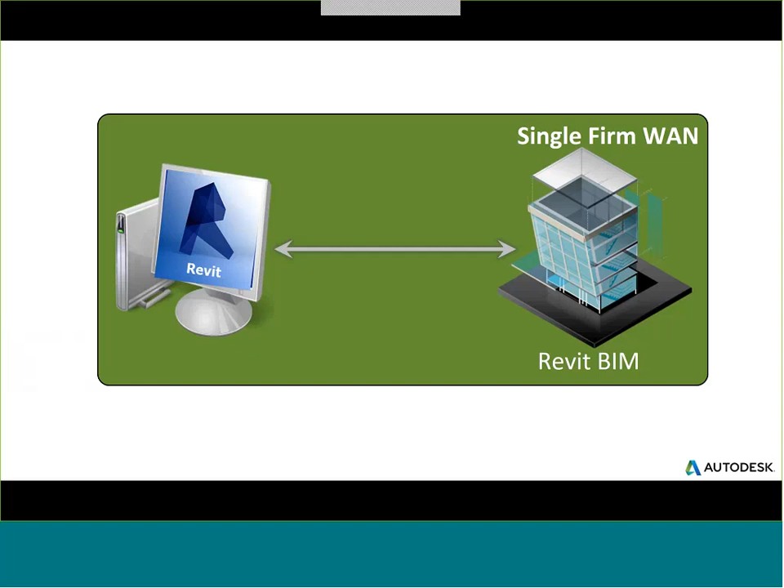You have a central file that you're making today internally. Essentially what you're looking for is this ability to bring that central file, and you know that the cloud is out there, and you start trying to think about how can we do this. And some people try to use cloud storage systems like repositories where they just upload the Revit file up there and then somebody downloads it back down and they think that that's sharing the central file.

Well, technically it's almost like going and mailing something - a letter comes into your mailbox and then you're going to mail that to somebody else. That's the equivalent of what they're talking about.

What we're talking about is no longer will you have to do a full - if this circle is 100 megabytes, no longer do you have to do a full upload of 100 megabytes and then pull down a full 100 megabytes and then rinse and repeat. That is not Collaboration for Revit.

Collaboration for Revit is going to be, hey, let me reload the latest and greatest nuggets of what my model is all about instead of me propagating the entire heavy package. So it's not totally new as a concept, and this is what many firms have been doing when they put money and technology and time and people at the problem.

So cloud sharing, this is one way that I know firms are trying to do it without buying the service of Collaboration for Revit. So make no mistake, there are dollars being spent here. And the dollars typically mean that they're buying software, or they're buying hardware. They're applying a Revit server software to it. They're spending money on VPN connections, which is actually the holy grail behind all this stuff.

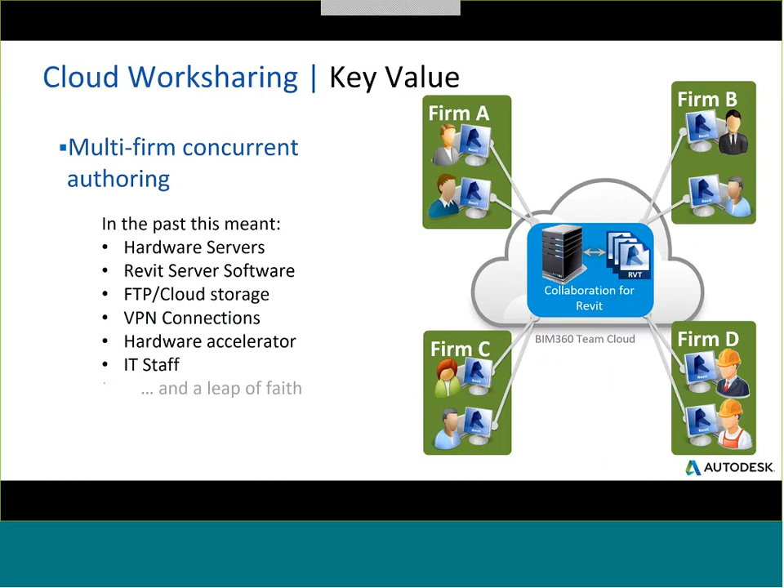So what this saves, and I'm all for IT, some of my best friends are IT people, but IT can help institute the rollout of Collaboration for Revit, not with their technology, but possibly through the administration of the licenses. So no more is IT seen like this, with your project managers jumping through the hoops. That is gone by the wayside. That's not the case anymore.

IT will administer, or if you have IT and they're administering your Autodesk licenses, they can administer those licenses to the people that need them most and give them the right licenses for the right amount of time that they need it. Those are really good precedents for Autodesk technology as compared to using Revit for project managers.

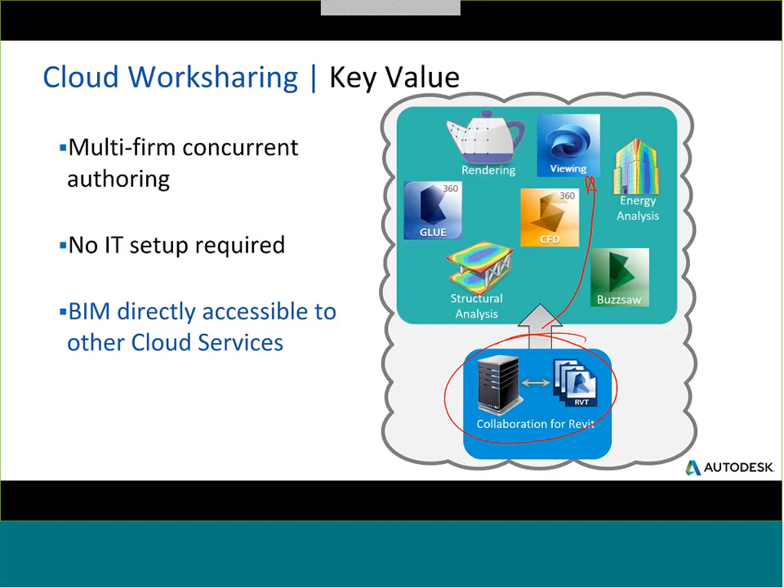So one of the big things we're going to see is when we're leveraging the cloud, how can we also use the cloud for that viewing piece that I'm highlighting? And again, this is where BIM 360 Team comes in, and only Team is allowing you to view those things with a very light Team license.

So this is me with a little bit more hair. Usually my hairline kind of stops right about there, and I'll put my geek hat on here and tell you some of the inner workings of C4R.

So we implement a delta caching system and a delta upload. That basically means when you first start running C4R, the very first time you collaborate in the cloud, remember I said 100 megabyte file? Well, when it first goes to the cloud, obviously it has to put the whole model there. So yes, the very first time it pushes 100 megabytes up. It pushes 100 megabytes up, and then it's in the cloud and it says, okay, Caesar wants to work on this file, so it pulls 100 megabytes down. Once one way, once another way, and it develops this local cache.

So in a nutshell, the local cache actually gets built without you even knowing it, and it gets put into a hidden user profile file. It's typically, if you want to look into it, under your profile name, under all user, or under your username, under the AppData hidden file directory under local. It's down there in the basement, but it's there. So that's the very first part.

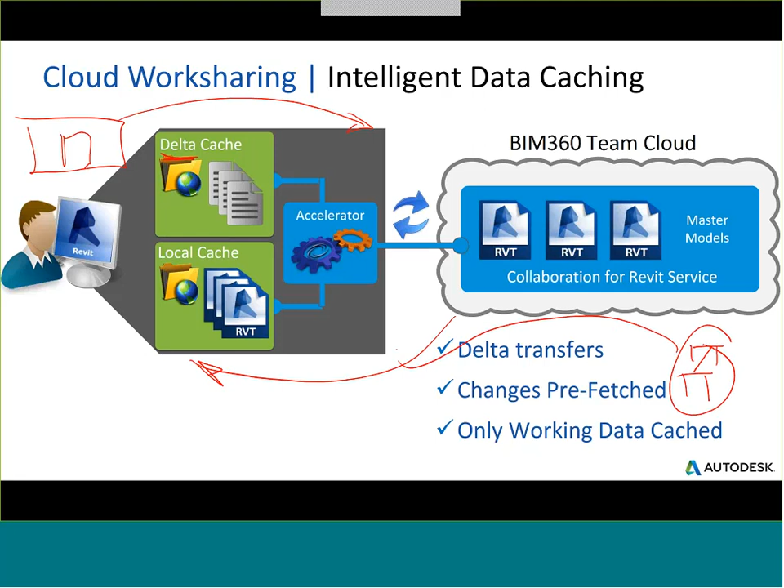This saves all that trouble. So this saving is a savings in time. It is also a saving, and I no longer have to concern myself about versioning because it takes care of itself automatically. So these are safeguards, and they are pointing to a savings, a return on investment.

The part about communication, this is part 2 of the discussion. We think about Revit as a mission-critical tool, but there is really no great way to communicate inside of Revit. That's why we pound ourselves with emails and simple little questions, and we get tons of them in a day. We've built into Collaboration for Revit the Communicator aspect, which gives people a palette called Communicator in Revit while the session's running.

You can see your teammates signed in. When I sign in, I'll show up here with a little green indicator saying I'm online right now. I can do direct one-on-one chats with a person, or a team chat, like 'hey guys, I've updated the grid, it's now 12'2" on spacing, grid line to grid line.' I can also do screen captures to illustrate what I'm trying to say as far as written information. These are all good mechanisms to help reduce email.

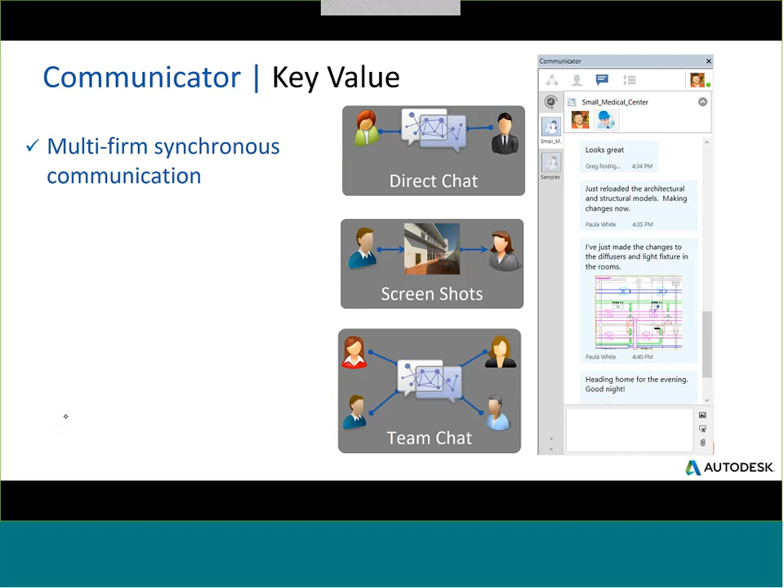So those are all great things in Communicator, but like your favorite cheesy commercial on TV, we're not done there. Contextual awareness is fantastic because with Revit Server, you never really knew who was saving to central, and sometimes it felt like it was bottlenecking, taking longer today to save than it did yesterday. Communicator is nice because you get to see the context of who is saving when and what they actually saved at that time.

And lastly, for those people that feel disenfranchised because they never get the new cool stuff to play with, let's bring them back into the sandbox and connect the entire team together. This is where an individual license of BIM 360 Team can be purchased just for those users who are not on Collaboration for Revit. So buying a BIM 360 Team license allows these things for those people.

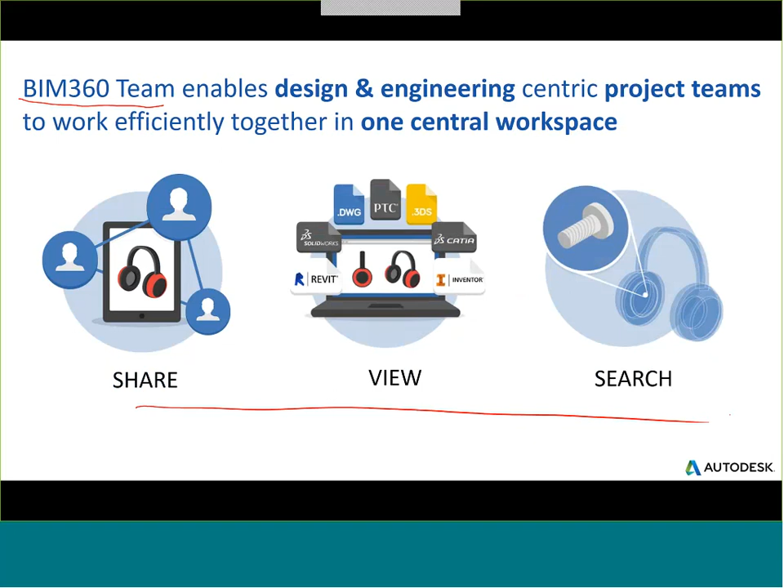Some of the highlights include 2D, 3D markup capabilities. One of the huge differentiators, because I know many of you are using some kind of PDF competitive software to do your design reviews, that's fine. But let me propose something to increase your savings and have everything here. I'd propose that you run an Autodesk kind of shop with some of these design markup tools. The differentiator we hold is we allow you to put these file formats into Team and view them natively. So if you had a file format you created, say PDF, because you wanted somebody to review and mark it up, you no longer need to create a PDF file. You can put the native files up there and they can review them.

The design markup explicitly works on Revit and DWG files, the native files. So that markup overlays on top of it. It doesn't embed itself into these files. It's an overlay, and it's part of the team website.

The native viewing that we have is for all of these files. You can comment, so I'm just going to put the letter C above this. You can put comments on the DOC and Excel files and have them natively viewed inside of Team as well.

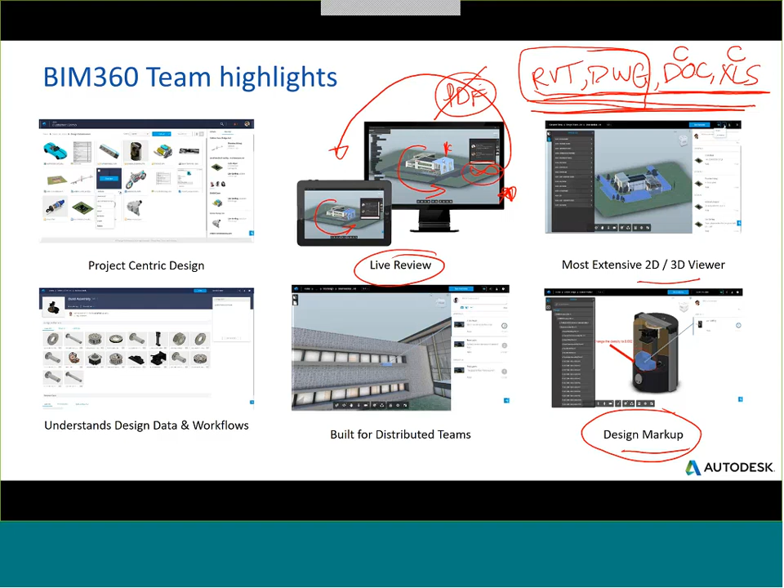Jana will say, okay, I'm sitting at the coffee shop, I've got my iPad, you want to show me what you're looking at on screen. So as I rotate this model, Jana's going to see the same rotation because her view is my view. We can use the chat window inside of this to chat, or use our telephones for audio. The Live Review is fantastic because it's a no charge extension that you can send this link to anybody, even if they're not on Team, and they can check out your screen.

So the geek in me is willing to tell you that in any format, it's really running the very powerful Navisworks engine in the background that's been enhanced, but that's just the geek in me. You would never know it when you go on Team.

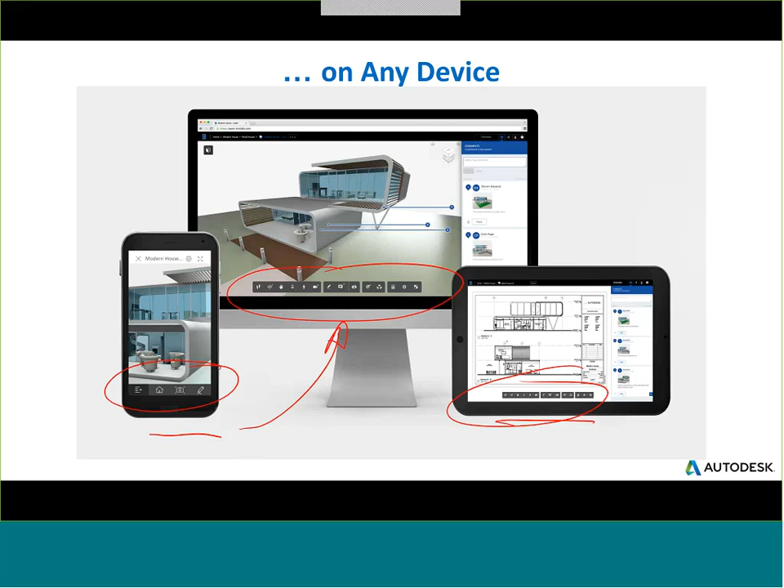You should know that we really focused on developing this for the tablets and iPhone first, and then we actually ported it over to be the web version for browsers of any computer, whether it's Mac or PC. Your tools will really reflect the same usage across all devices, which makes it very usable.

And so in a nutshell, it's kind of like that shopping channel. So what's included? Central file.

You get to work in the central file, the files in the cloud. You're always working remote on your desktops. When you buy Collaboration for Revit, those licenses include a license of Team for that same user. The Communicator gets turned on inside of Revit, and you get to use it with the other people who are in that project with you who are also using Revit.

The model management and versioning tools, that's a function of Team, and we will manage the versions for you out of the gate. And the scalable licensing, this is where I was saying IT can really help out here, or whoever's administering your Autodesk licenses.

Jana comes into my project, I can allocate a license to her, and then once she's done the project because she's moved on to something else or she's left the firm, Lord forbid, I can revoke that license and administer it to somebody else. So moral of the story, the license follows the user and not the machine.

Right, so I can run my user license on any machine that I walk up to as far as Collaboration for Revit or Team.

So there's a price to it, and it is much more affordable than running that other shenanigans with the VPN connection and the hardware servers. $800 a year for a single license, but the payoff can be, if it just saves you 10 minutes a week for the duration of a year, it'll pay for itself. And think of the times that you upload and download and move those files around.

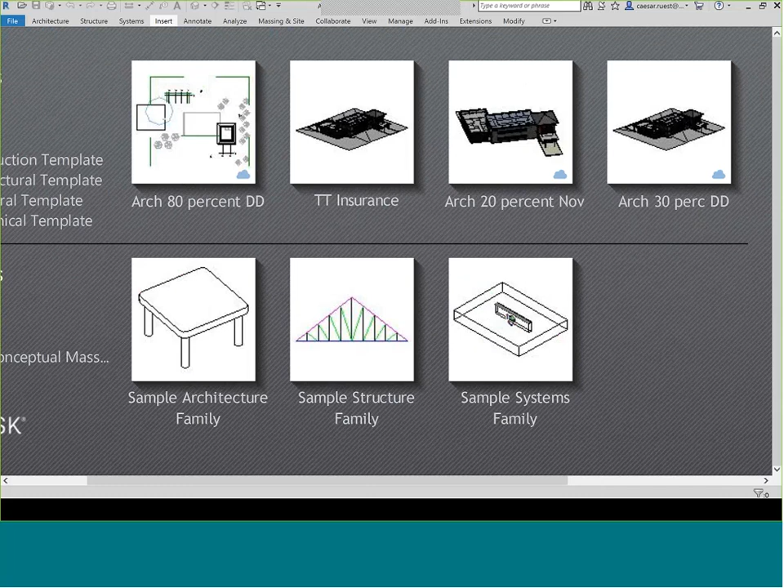So how do we know that we've got collaboration for Revit and we're using it? Right within Revit you can see some differences if you've never seen this before. You see these little monikers, a little cloud. You can see the path, BIM 360, May 2107. This one here, TT Insurance, C temp drive, TT Insurance. This is telling you local file, cloud file — this file is living in the cloud. You'll also see we've got the hooks to go to BIM 360 team right there. That's because C4R is already installed, but now you've activated your license of C4R, and that's why you see this hook into BIM 360. Clicking on it would let you get into that BIM 360 cloud and open up the file.

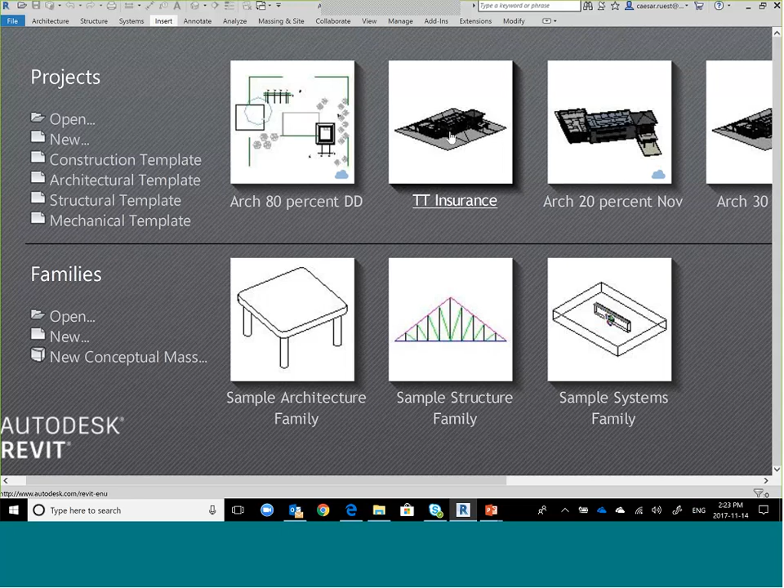Let me step back to show you how to get the file there in the first place. So TT Insurance, let's pick on that for a second.

So from C drive, I want to go to my Collaborate tab. This is not a central file, but it could be — it's up to you. When we click on Collaborate in the cloud for the very first time, this button goes away; once it's in the cloud, this button will disappear. But now that it's not in the cloud yet, that's why it's showing up. So we're going to click on it. This is where we're preparing, just about to send it out to the cloud. Now I'm going to call this — let's say this is my 80% DD for Jana — and I want to push this to the cloud.

And you kind of ask, okay, so where are these things? These are projects sitting somewhere. Well, this is my cloud projects. So as an administrator, somebody that buys the licenses and wants to start rolling this out, the first thing you do is create yourself a hub, and then create your projects that come out of that hub. So here's my hub — picture this to be your company name. Each license of BIM 360 or Collaboration for Revit gives you a single hub of 500 gigabytes. As a company, if you bought 4 licenses of BIM 360 Team or 4 licenses of Collaboration for Revit, you'll have 4 times 500 gigabytes, so effectively 2 terabytes of storage at your capacity, because it can pool together for a corporate hub. From this hub, you create your projects.

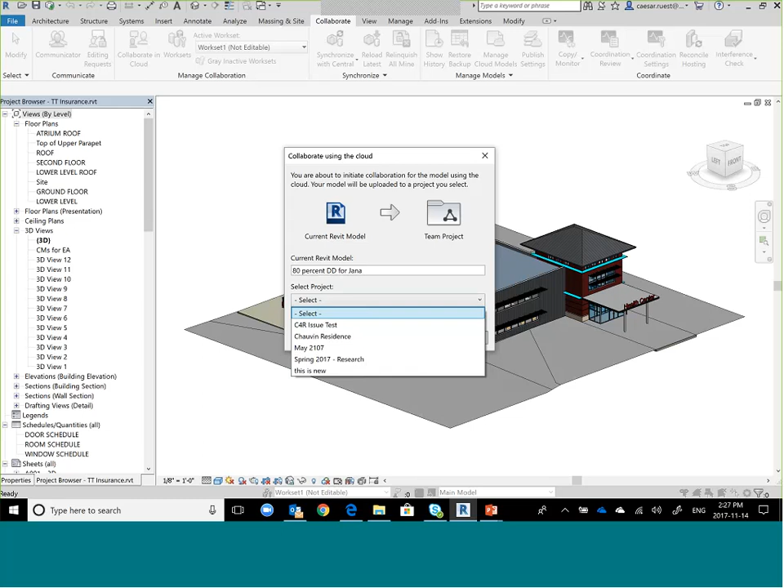So the administrator will do this. This was part of a question Jana had asked me to address: how do BIM managers have the ability to manage all projects on C4R? This is it. As the administrator, you're Superman or Wonder Woman — pick your favorite superhero, you're that godlike person. You, as the administrator, control these projects. If I have Jana, who's my project manager of May 2107, as the administrator I'd make her the project manager, and she would only manage this project. So when I go into May 2107, Jana would be here, she'd show up as one of my members, and she'd be able to invite people to this project. But she wouldn't see the other projects I created as administrator. So those are the steps you take to create projects from your hub, and then administer them to other users. We created this project along with these other ones, and that's the only reason why when I come here I can say I want to put this file up into the May 2107 project and initiate.

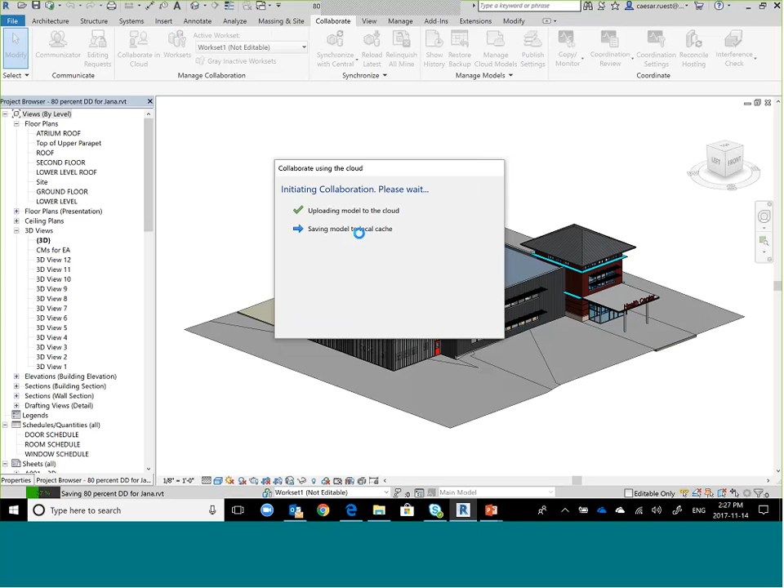So this is not a central file, so it converts it to a central file by creating default work sets. You'll see at the top of my screen, it's going to change my file name over to this new file name. So it will abandon my local file and my local file name, because when it's done uploading it to the cloud...

It automatically comes back to say, hey, Cesar wants to start working on this. I'm going to save him a locally cached version of that central file, which is the local file. So many of you, if you've done this today with central files in your office, you know you manually have to create your own local file.

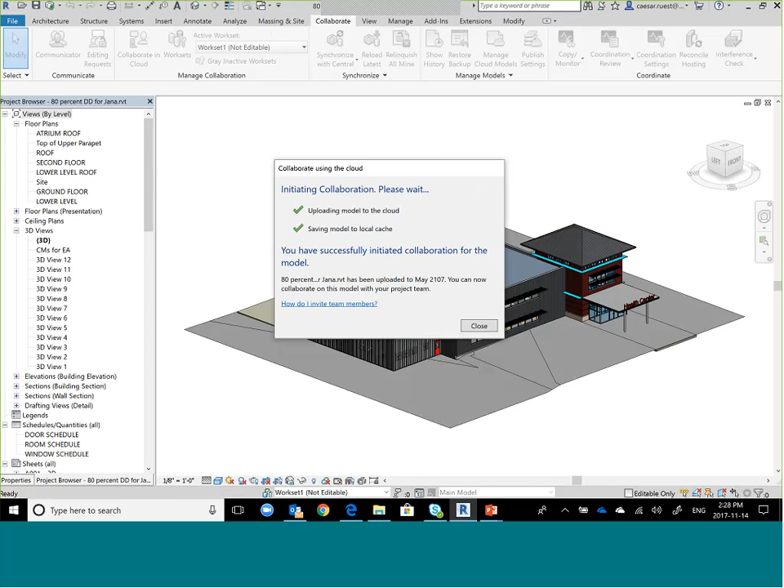Today, we do it transparently for you. So we're done. This lives in the cloud now because you've got your Save to Central icon lit up, and that button that was here is gone. Now, there are a few things you're going to become more familiar with.

There are parts of Revit maybe you've never touched called publishing. After the first Save to Central, it automatically puts a default model into Team because there was no placeholder there at all. So when I come into 2107, somewhere within here, there it is, it puts a default published view into Team.

But you should all know that we hold Collaboration for Revit separately. It's its own site, its own web server. That means the central files will never live in Team. These are only published views of the central file living in Team, for a few reasons. They live in two separate areas altogether. My central files can never be damaged by just people using Team.

But the real power comes to you guys now within Revit. If this is a publish capability, you would create a published sheet set name. So we created this new one called Sheet Plus. Let me create a brand new one, let's say for Jana. I'll say OK, and I'm going to tell it I want to use this one.

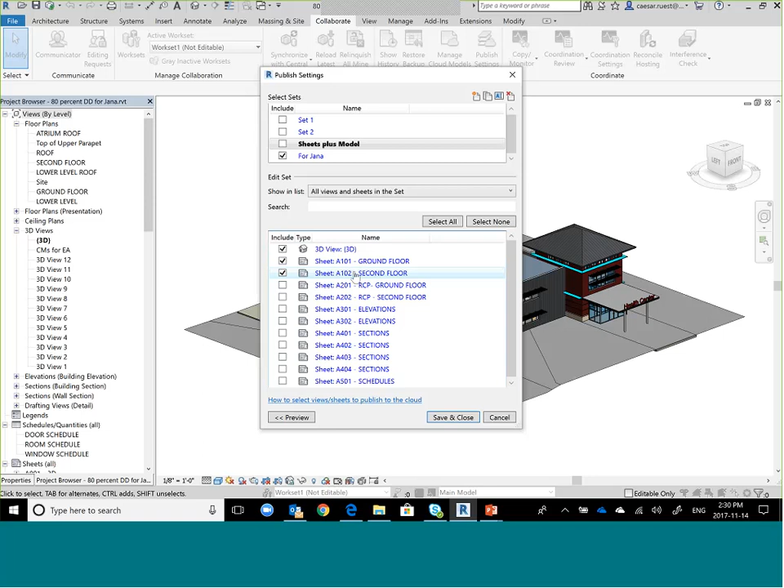In this publish set, I only want to send Jana the 3D model, the first floor, second floor, and what else? You can send other views too, but let's say we just want to send these three things to be published. In architecture, we want to send 80% DD and let somebody run with it for a week, so we only want to send them those sheets which are completed. This is the mechanism to do that.

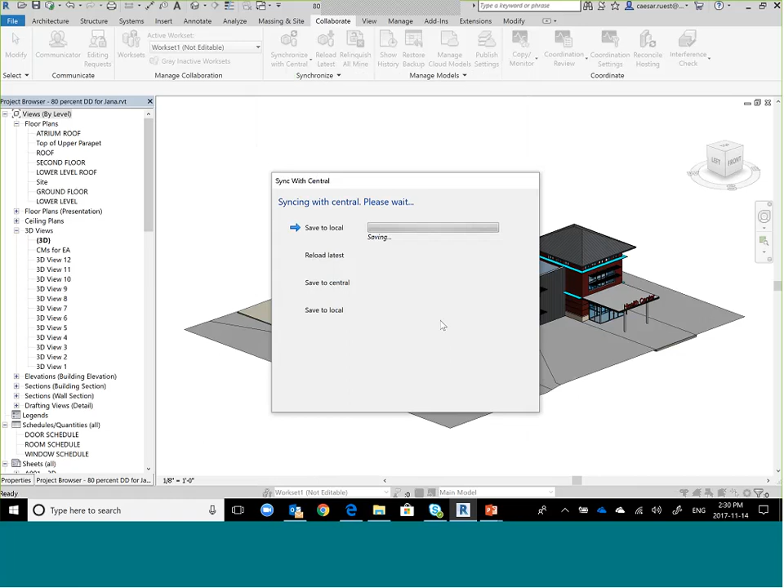So it gives you a chance to create a discrete set of views, and from those discrete sets of views, they will be published onto the Team site. So clicking Save to Central just saves those sheet sets with the central file, but it did not publish it yet. So for example, if I went onto Team right now, that's just saving to central, and we would think, oh okay, if I go into Team right now and took a look at Jana's file, I would only see those 3 views, and that's incorrect.

The only time publishing actions can take place is through Manage Cloud Models. This is button number 2. I showed you the Publish button a second ago. I'm on this button right now, Manage Cloud Models. This is the publishing area. So you would come to here, and I'll zoom in so you can see this.

So look at these files here. This Arch 80% DD, you can see it's got a green checkmark and it says latest version published. Whereas this one, like I told you, those 3 sheets I wanted to send out are not specifically sent out. So I would tell the system, okay, take the Collaboration for Revit model and publish this to Team. It gives you a little bit of education, you say 'got it', and you publish. Now you can close that window because it's going to go ahead and publish this to Team.

Now, if you had all of these files, as the administrator of this project, you can skip the steps of publishing every single one at a time, and you just come up here and say 'publish all'. That's what this button is for.

And while I'm in here, this has been a recurring question too. I've had people say, hey Caesar, I've got a file in Team. I keep deleting it off of Team, even though it says RVT. I keep coming to this drop down and saying delete. It keeps coming back, like what's going on?

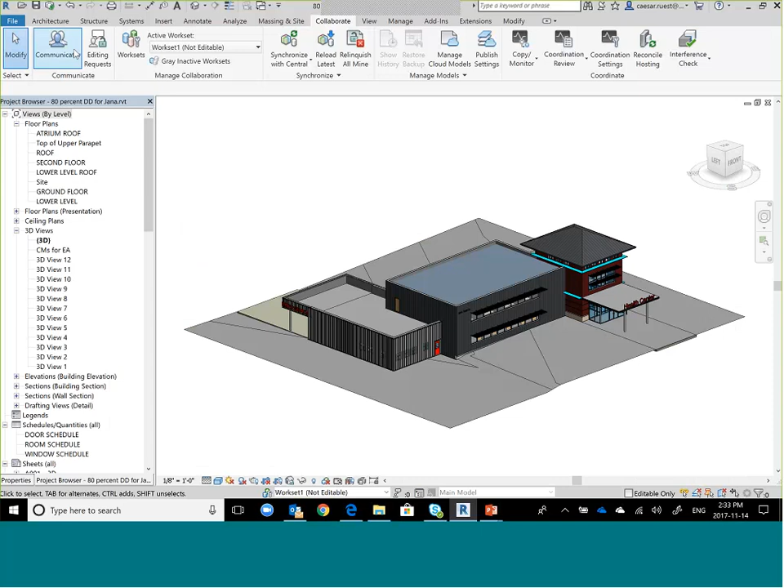So within that section, let me finish off Revit with the Communicator. Here, this is where you're going to find all of your teammates. In this project right now it's just me, I feel alone, like me and Mark in this project. But if I go to all projects, this is where you'll find all of your projects that you're working in Collaboration for Revit.

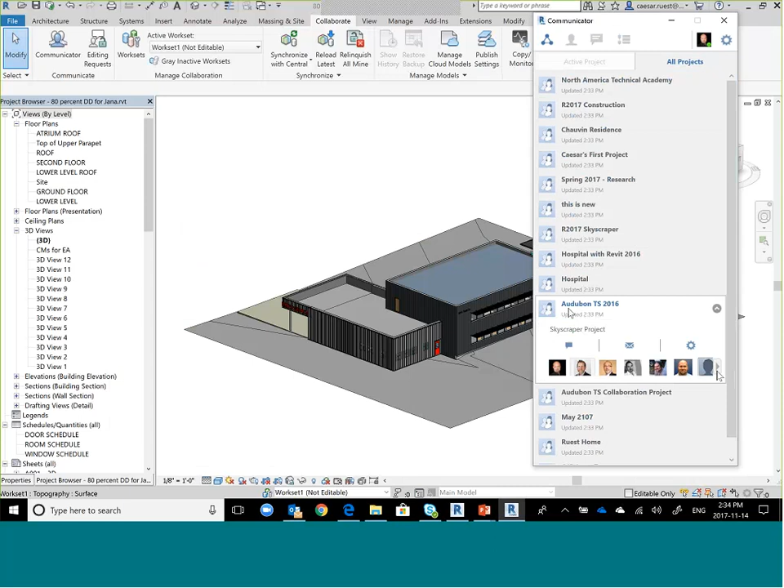And when you click on a project, you'll see your teammates in that project. And if you dig further into it, you'll see the past comments put into there. So in this case here, we had a little bit of a conversation. What about removing? And then Joe said, do you have the latest structural model? All date stamped and historical in nature.

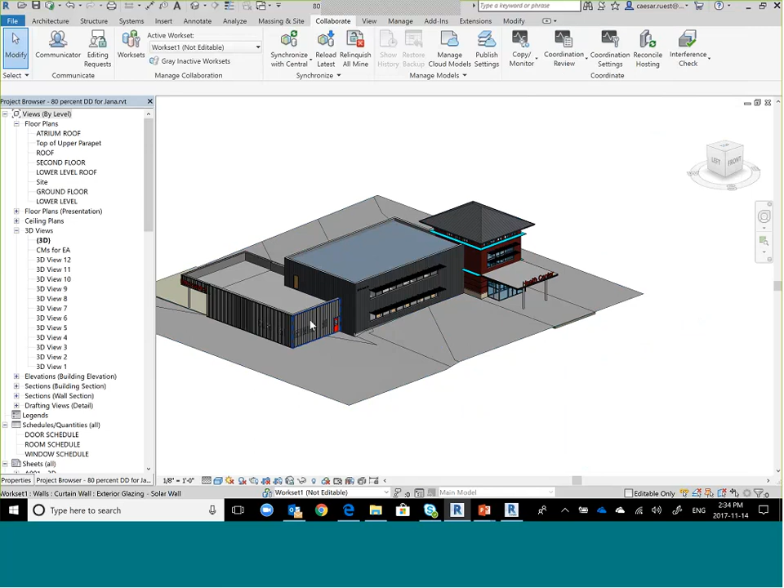And you can see right down here, I was having a little bit of fun with this one door. This one question I had the other day was, is this a prison cell? Because if you look at all of my windows, it looks like I've got strapping coming down in front of them, making it look like a prison of sorts. So I did that with my screen capture tools, just by clicking, capturing, and then questioning. What the?

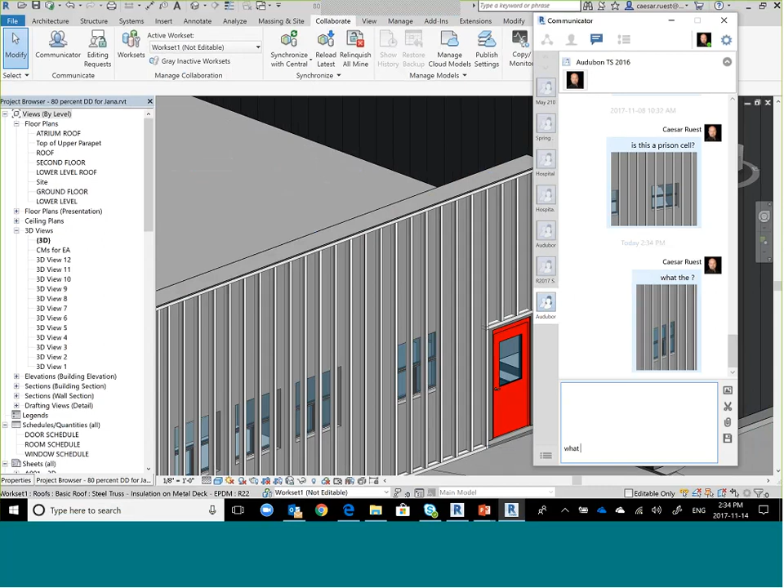That's Communicator. And then you'll notice right here under the active model, when I sync to central, and I say OK, and I look at Communicator, you're going to see it's syncing right now, and it's got the little lights flashing here. So this helps everybody know, oh, okay, Caesar's syncing to central. I'm going to hold off on that for a second.

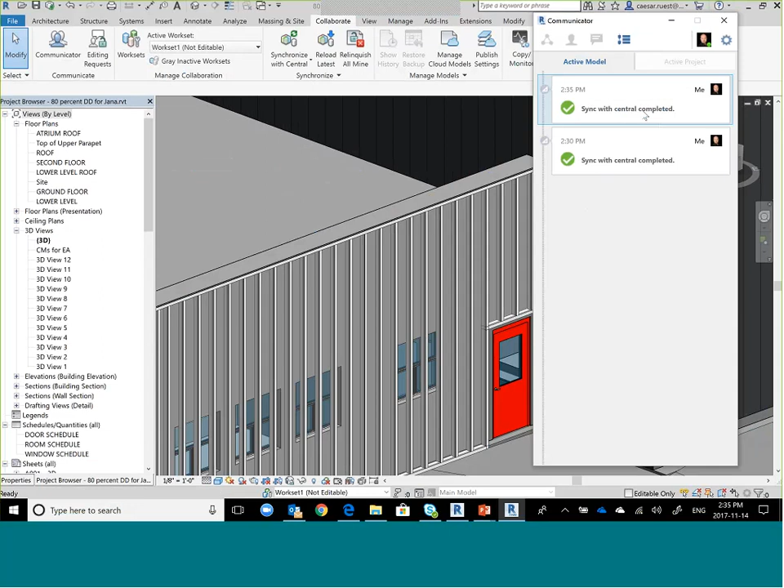Okay, so this was part 1 and part 2 of that PowerPoint. Let's fast forward a little bit now into part 3, and let's get into Team. So here's that May 2107 site. List view, it's all listed out. Thumbnail view, now we get thumbnails. You can see all of the different file formats, DWG, the versioning here.

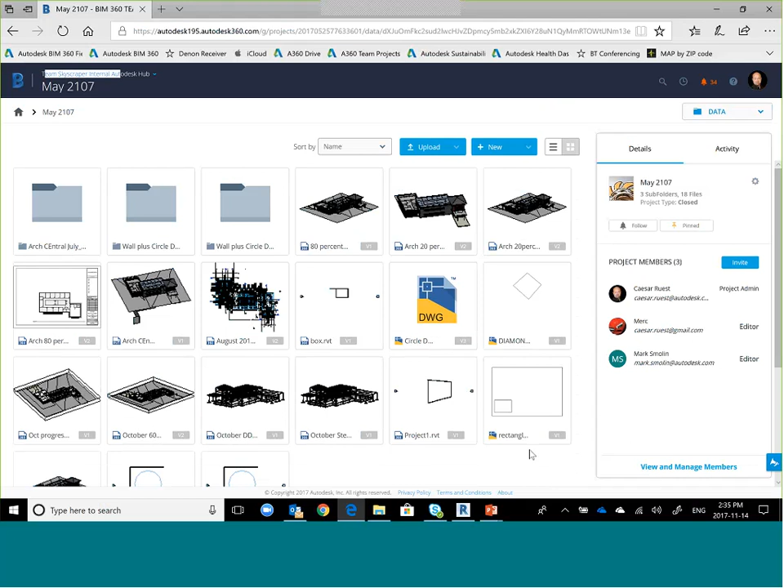I've also got links. Oh, there's one thing I wanted to show you too, is how do you start linking things inside of Revit? This is really important. First off, that virtual drive that I was talking to you about, you come here in Team, and this is how you get it. From your icon of your user profile, look way down here, it's called Desktop Connector for BIM 360.

Go and get it. So when you click it, it'll run you through the download process of getting it, install it. It looks like this when it's done. So for example, here under this PC, there's my C drive, there's BIM 360 Team. You'll see, like I said, it's a virtual drive. So when you double click it, it says, hey Caesar, you've got these hubs.

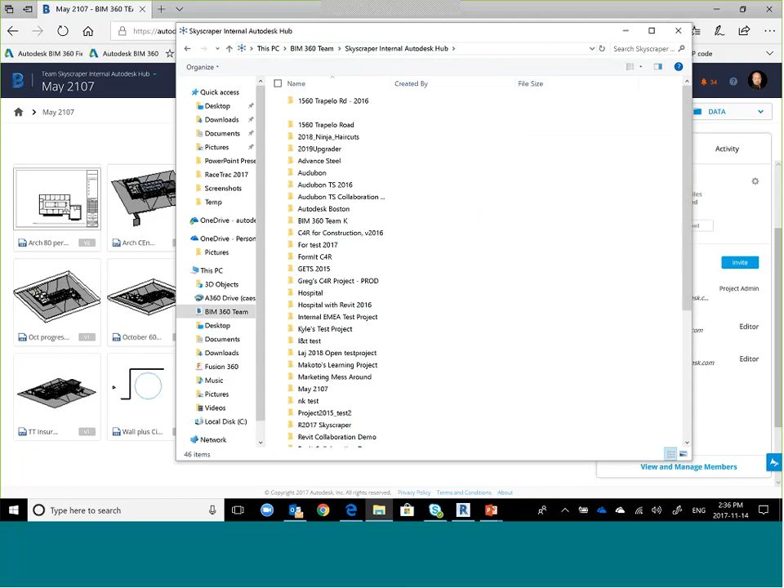Double click it, let's go into the skyscraper hub. Hey, you've got access to all of these projects. There's May 2107, double click it. And here we go, all of these files you see on this web browser behind me are all right here. And you can drag and drop from and to, in through this virtual connector.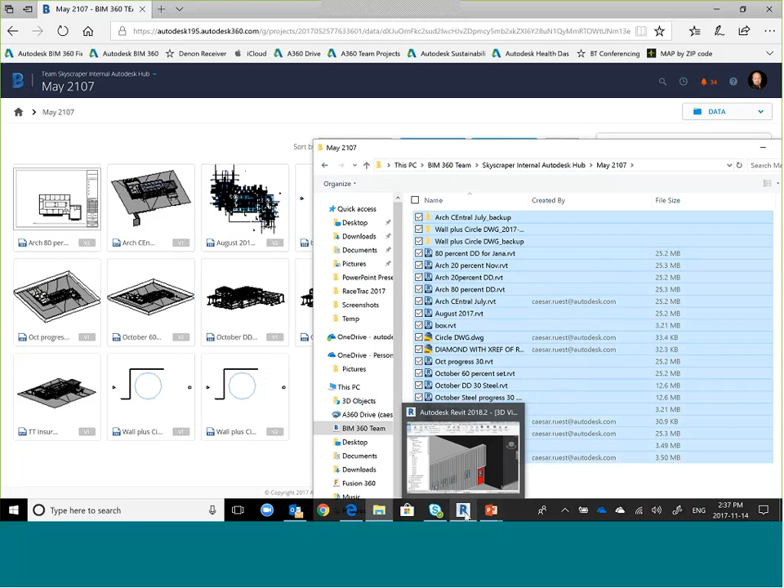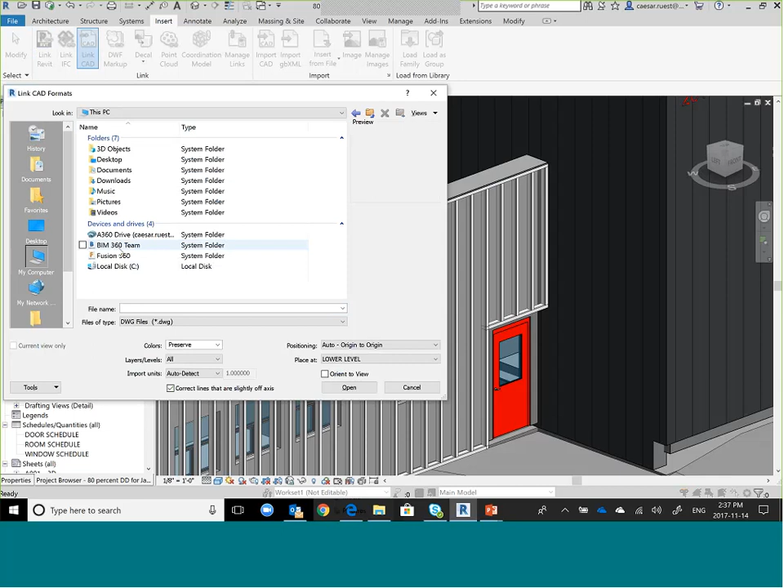This is the mechanism to which you use Revit and link DWGs or link non-essential Revit files, like detail files and stuff like that. So when you do insert Revit link or insert CAD link - I didn't want to do the Revit, so there's my cloud, that's not the big deal, I wanted to go to CAD - so CAD link, you're going to browse to my computer, and there's your BIM 360 virtual drive. You just double click right into it, and you go all the way through it.

When it comes down to what it does in the end, you'll see, I'll open this one here. This will show you the cloud pathing that takes place. So before last week, there was no good way to link DWGs into Collaboration for Revit sessions. There was no good way to do it other than linking from local servers.

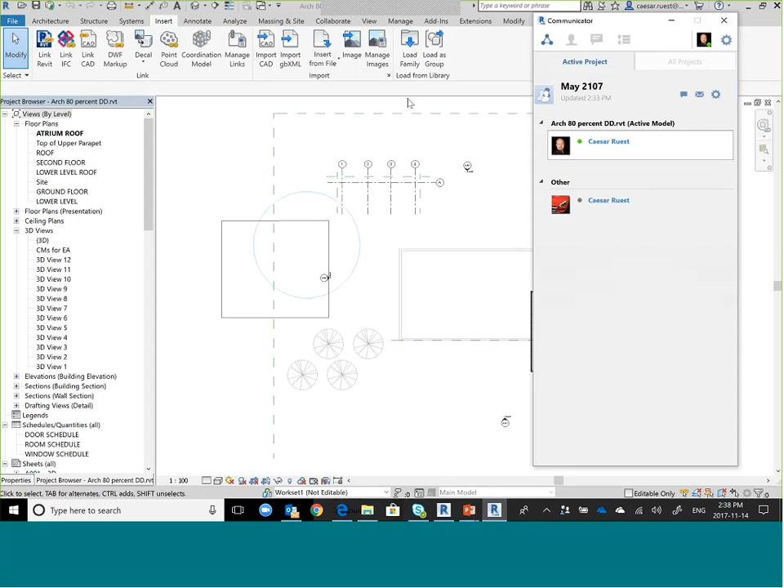But now look at what's going on here. This is a CAD link, a circle and a square. Very complicated, I know.

Manage links will expose a few things here. So under CAD formats, you'll see my circle in DWG. Look at this, path type cloud. That's exactly what you want. You don't want it pointing back to your user profile name, because that's what it used to do.

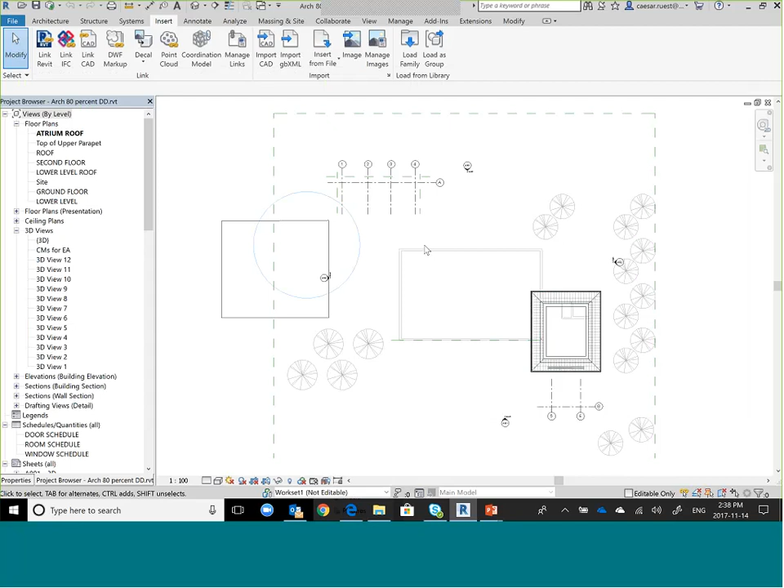Under Revit links, I did the same thing. I linked a Revit file. This was a non-essential kind of Revit file, more of a detail file. So I linked that in. That means when I share this entire file with anybody and Jana opens it up on her computer, the links will be maintained.

It's almost like a little song there from Disney or something like that.

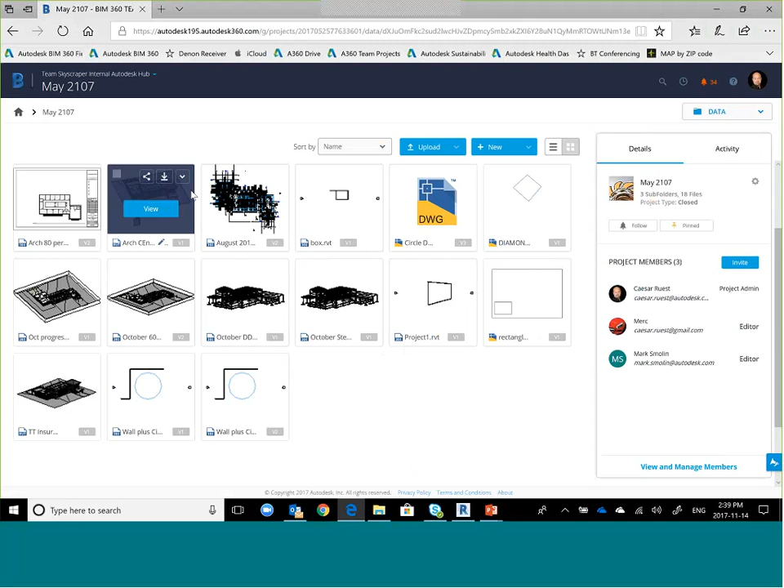So anyways, that's the best thing since sliced bread today, that desktop connector. Let's go back to our program now and show you BIM 360 Team. I'm going to show you a more complete site that has some things that I really like to highlight. Oh yeah, plus...

I'm going to show it to you all from the power of my phone. So let me bring up my phone here for a second. So here we go, I love showing the phone now. I'm going to dig into the hospital Revit 2016 project in the background. But while I do that, you're going to see me go on my phone here. And there's my hospital 2016 right here.

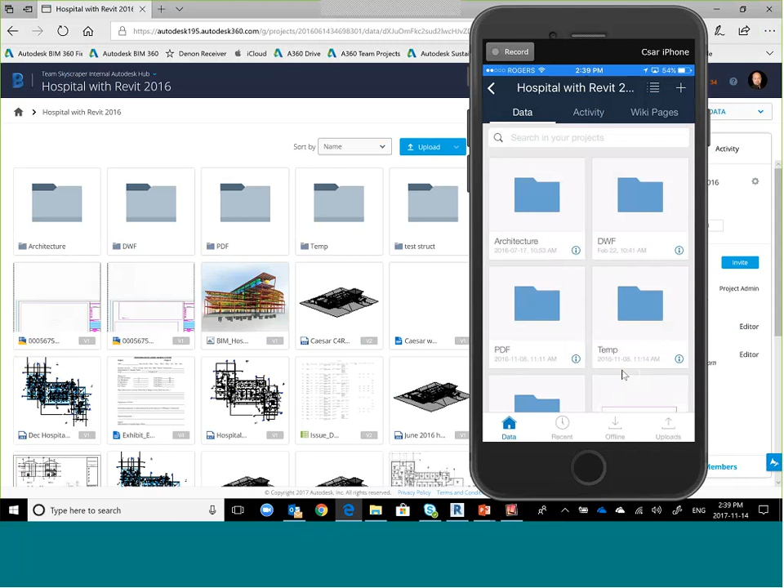And I click on that. I'm going to access those files. See the folder structures? Exact same, of course. It's the cloud. And if my computer and phone are reaching to the same cloud, I should see the same files. There's the images, see them all?

And I want to go and show you some information. Oh look, there's a Word document. You can bring that up on your phone. There's an Excel spreadsheet. Half the battles I get with people are, hey Caesar, I just want something that I can see and view from my phone. So the phone is the differentiating tool. The native viewing capabilities is a value add.

And you can still comment on these documents. You can redline and markup on the Revit and DWGs, but you can still comment. You can't redline markup the docs and Excel files, but at least you can comment.

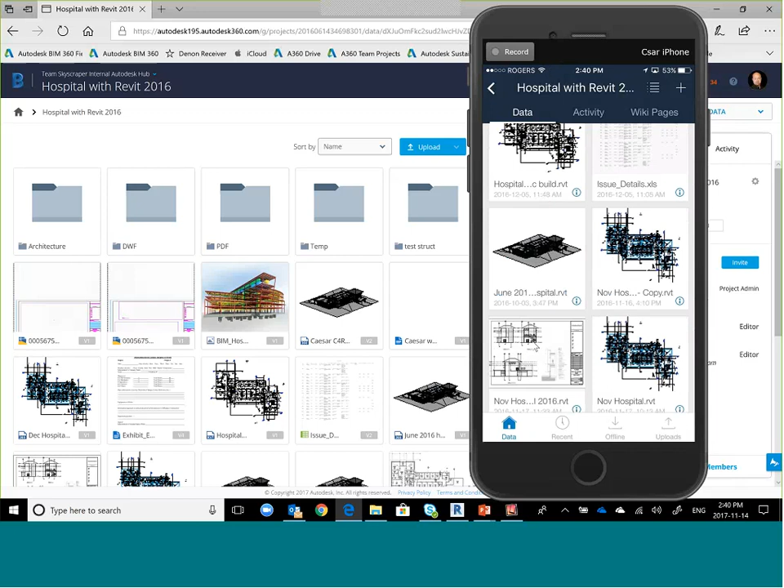So I want to show you the redline markup. Let me go down here to this one file. So I'm going to bring your attention to this one here. This file is called November Hospital RVT.

And on my phone, there it is right there. You can check it out just to make sure. It shows you an information bubble. You can see it's on version 4. It's about 25 meg, the last time it was updated, blah blah blah blah blah. And close that off and just open that sucker.

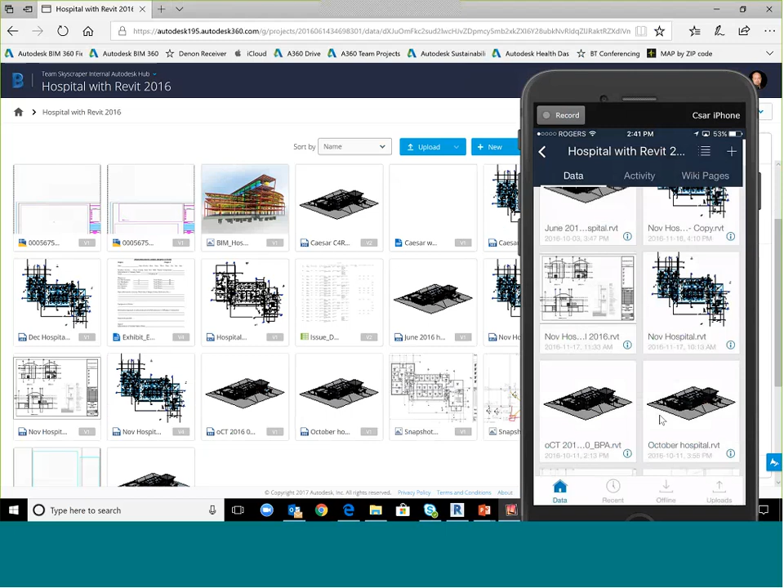And let's do the same thing on our computer. Watch the comparisons. A lot of similarities, almost practically, I can't say identical because the physical sizes are limiting to the phone versus my computer, but there's your tools, here's your tools.

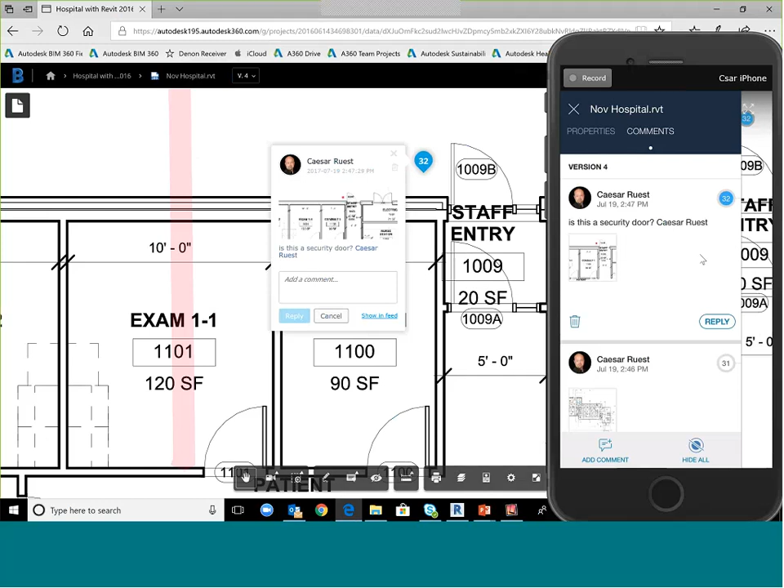This is a security door, or is this a security door, is the question that I raised. So right from your phone, you can say, yep, dangerous stuff.

Reply. And you can also do other things too. When you're doing the reply, you could actually say at, and then say Caesar. The replies themselves are fundamental to...

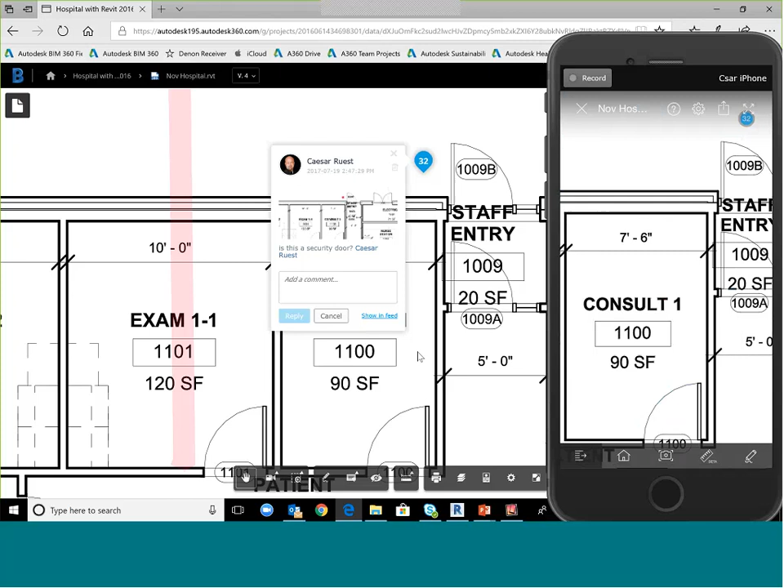So that should be synchronized there. I just want to go back into this and see if it shows up with my reply. So let's refresh this. With browsers, you know that you do have to refresh things. Just because your browser's sitting there open, if it hasn't refreshed, it's not going to change or find new data automatically. You have to click on refresh.

So as long as the internet gods kind of work with me here, I'll be fine.

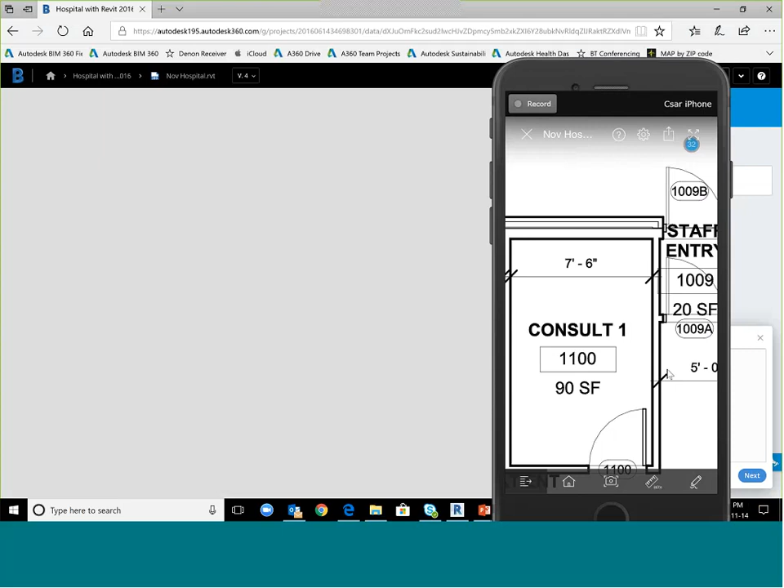So coming back to my phone, let's zoom in out of this and let's see something else. So we've got our markup tools down here. So let's mark up, and you see text, freehand, color.

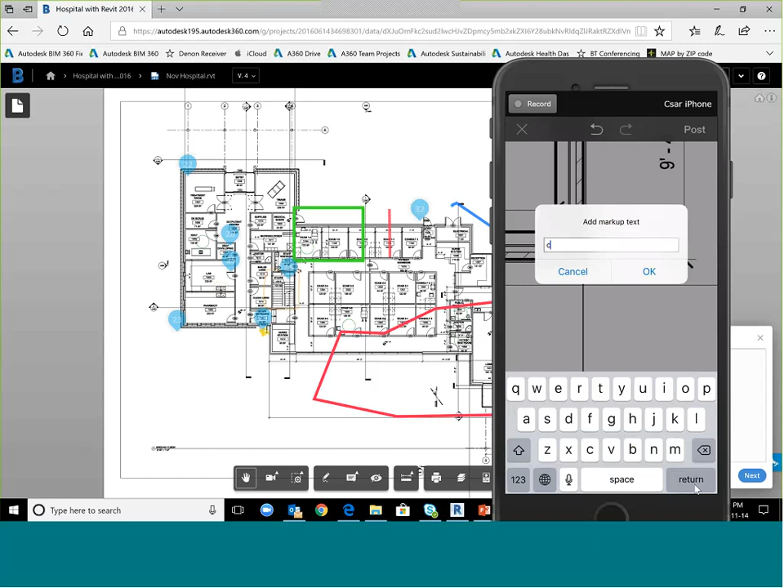Zoom in, and change corner — that's supposed to say corner, not corper. And post. Sounds good to me.

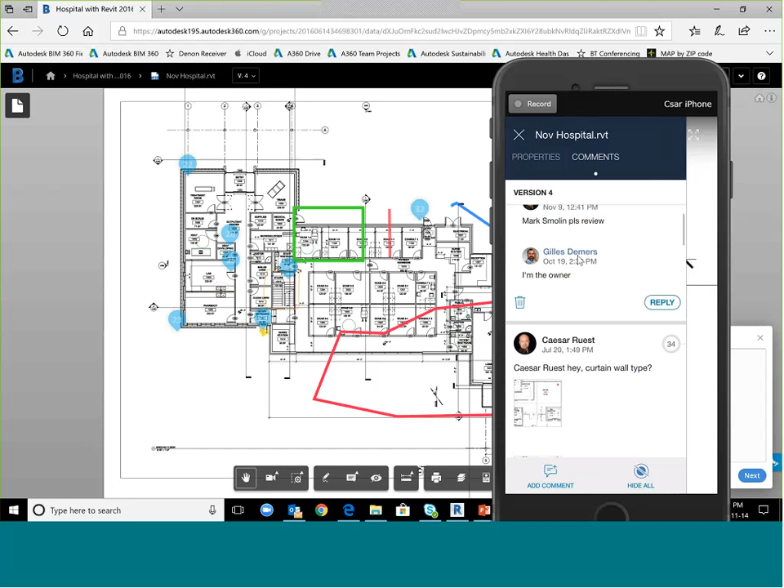So it's going to track it through these comment bubbles, and it's a comment history that you have access to and who said what. Fantastic design tool here. Coming back to my screen over here, let's see what we've got going. So if we go to the overview, this is where it's going to really let us see these comments all the way through. So we've got these 4 sheets that we're managing.

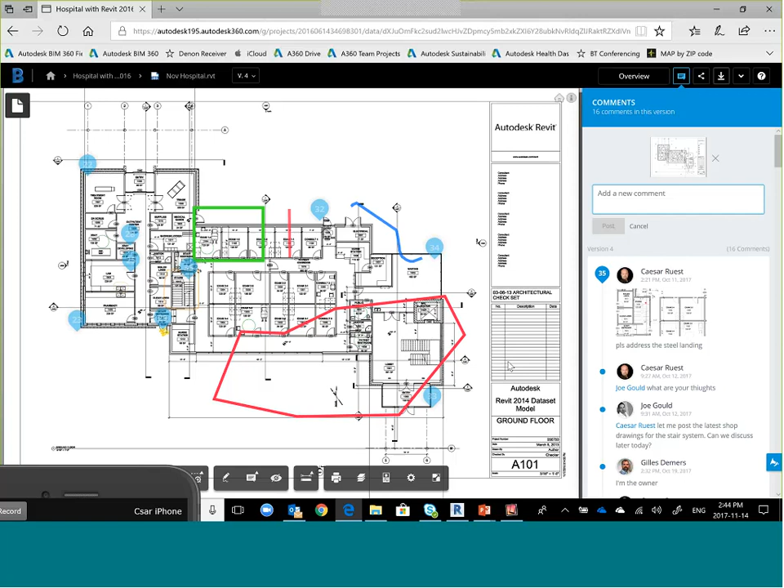Out of these 4 sheets, I really want to take note of a few things. These are sheets being versioned. So we're up to 4 versions on this Revit file. We're looking currently at the latest version. We have the opportunity to compare versions.

In this case here, we have our comment thread. On version 4, we had 16 comments. You can see the multiple threading taking place here when I said reply, and I say at Joe. There's Joe. He will get an email now with this question, please review. And he'll get that email, but it'll push him back to this site to come and review it.

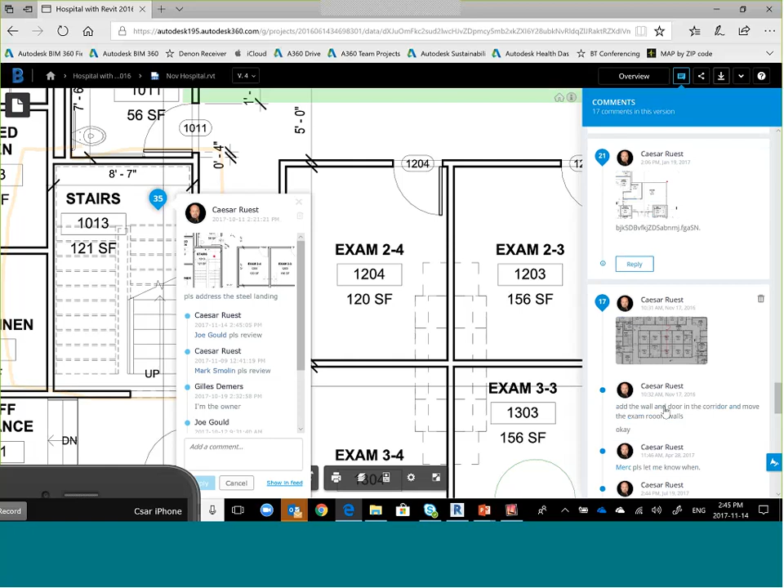Now, when I scroll down further, because we're on version 4, you'll see that I come up to version 3 here in a second. There's version 3. So from this point forward, all of these comments existed on version 3 of this Revit file. This is a very practical workflow, especially with this example right here.

Within this example, I clicked on it. It's going to go and find this markup and bring it to me and only show me that thread right here in this comment trail.

So I know that this is the workflow from architects to engineers and so on, designers down to drafters. It's a shame that I'm playing in the sandbox by myself, because I'm the architect, I'm the project manager, I'm the Revit user, I'm also the summer student. And that's why I got all these things, like add the wall and door, and this guy says, I approve this move, and then the Revit user says, okay, and then he says to the summer student, hey Merc, let me know when this is done. And Merc says, okay, it's cool to go, Caesar. So this is me in the sandbox. It's a really lonely life I lead. But if we wanted to see the result of this change, this is where this compare tool comes to play.

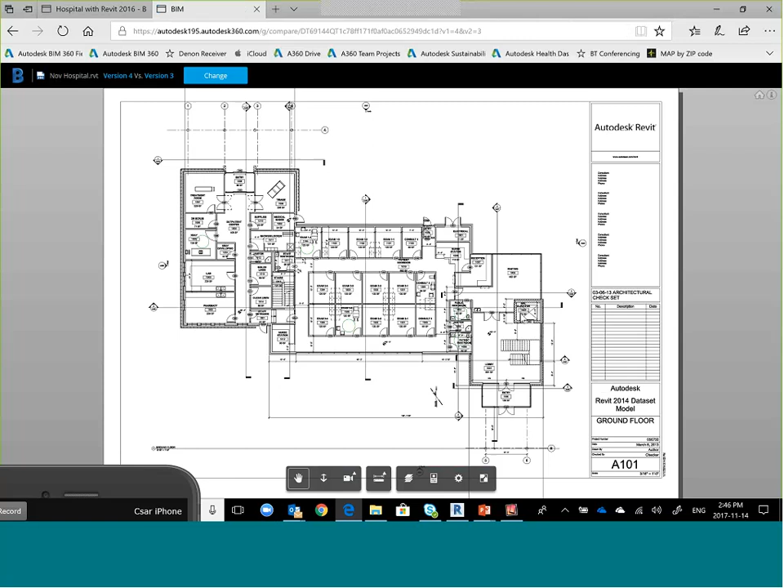This will be the last minute I spend here, so get your questions ready, and we'll do our Q&A in another minute. But this compare tool, every time I see this, it is like the best thing since sliced bread. These are active buttons on the right-hand panel. You can see things in color. The buttons illuminate or turn off the color at an object level.

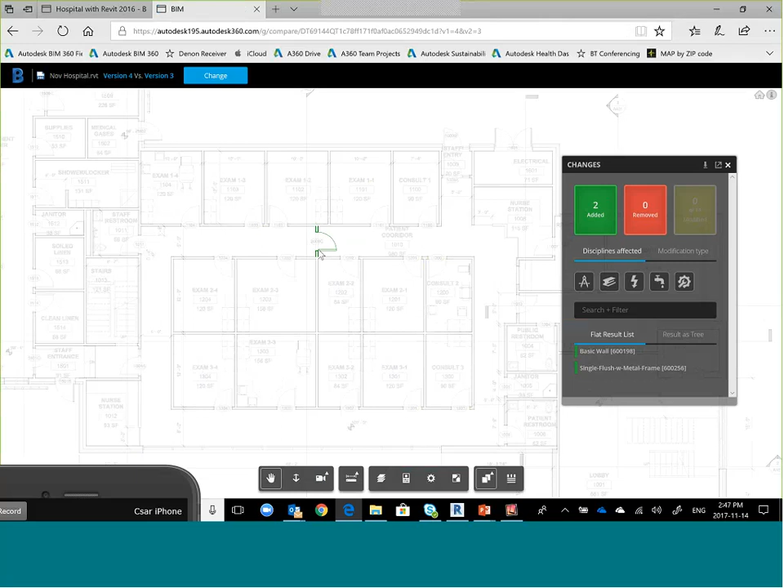At a Revit level, these are Revit objects, not PDF, not AutoCAD, we do object recognition of things added, removed, or modified. And from this, you can choose the objects here, or you can choose the objects on the screen to tell you the information of the change between version 3 and version 4.

The best thing since sliced bread is not necessarily that, it's this modified piece that I found very compelling. I want to see things that are modified, which are, you know, property information that has been added or changed, or it's been tweaked a bit, but visually you cannot tell.

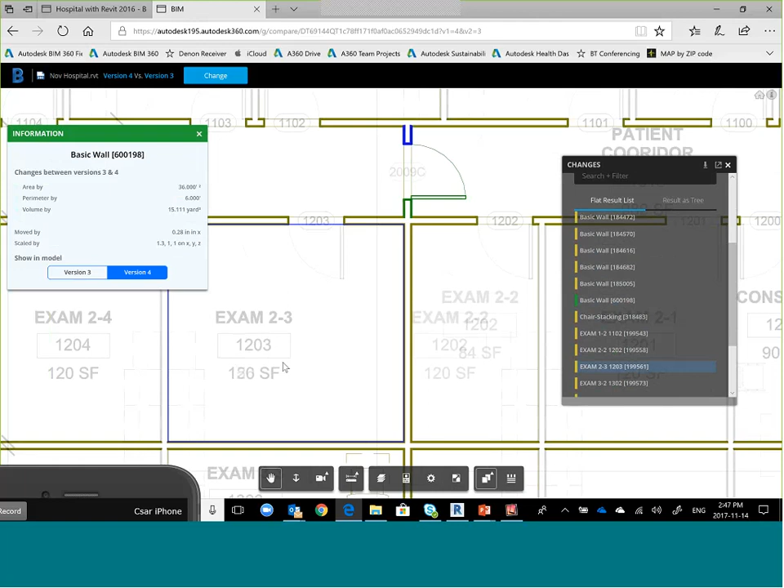So the modification, like this room, exam room 2-3 for example, anything that's in blue is highlighted, this is what's new. And if you go back to version 3, saying, well, in version 4, the area increased by 36 square feet, how big was it in version 3? You just choose that button, and it shows you version 3. It's a fantastic use of Revit technology embedded within Team to do a program review during design.

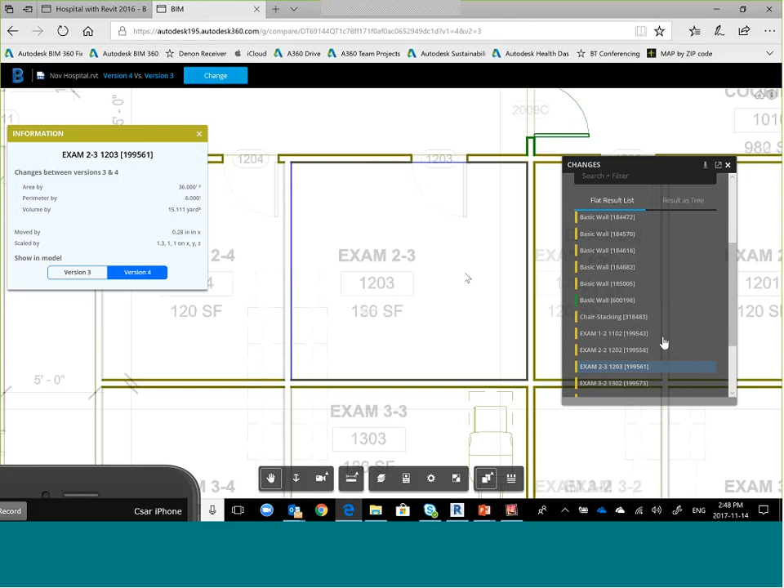And of course, you've got all your bells and whistles of your markup tools and stuff like that. I don't want to waste your time on the markup tools, because that's pretty essential stuff.

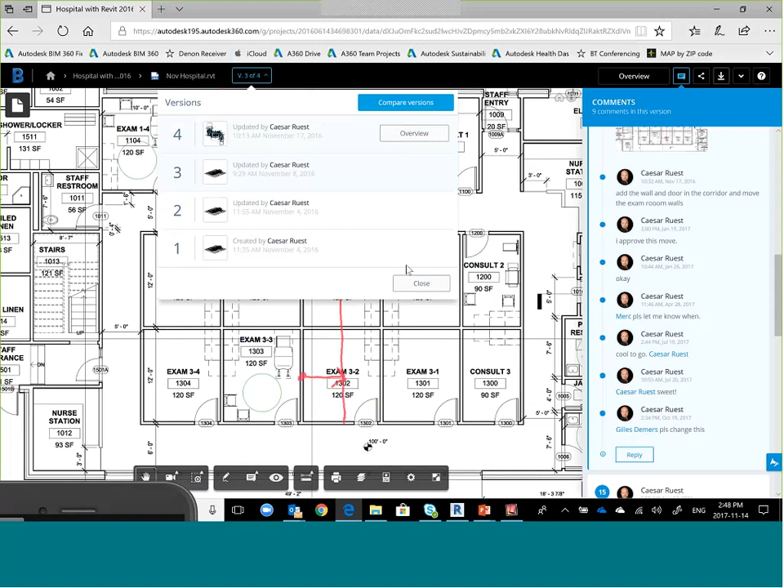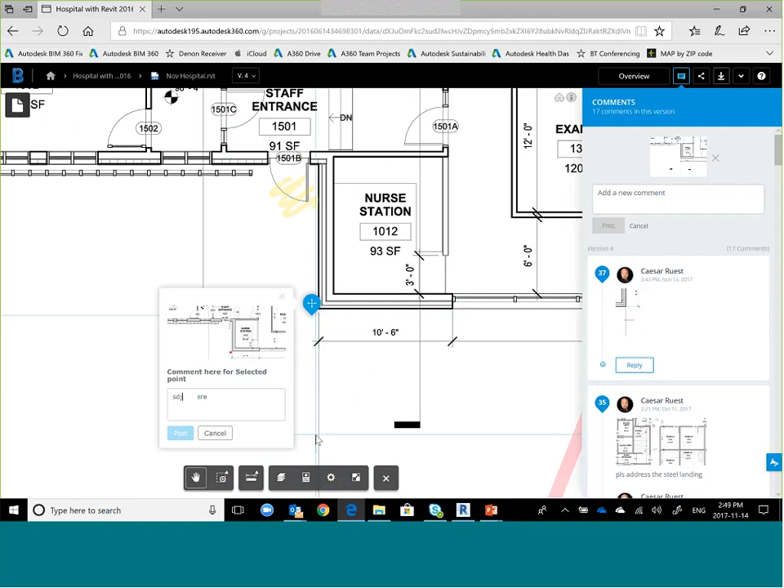The commenting things, this will actually be my last thing that I talk about. The commenting, to get these little bubbles here, just like I showed you on my phone, that's this little comment tool right here. So if I wanted to put a comment maybe on this corner of the building, I would just drop this comment at a point with my crosshairs right there, and then this is how I'm going to start to comment. Blah, blah, blah. And then post.